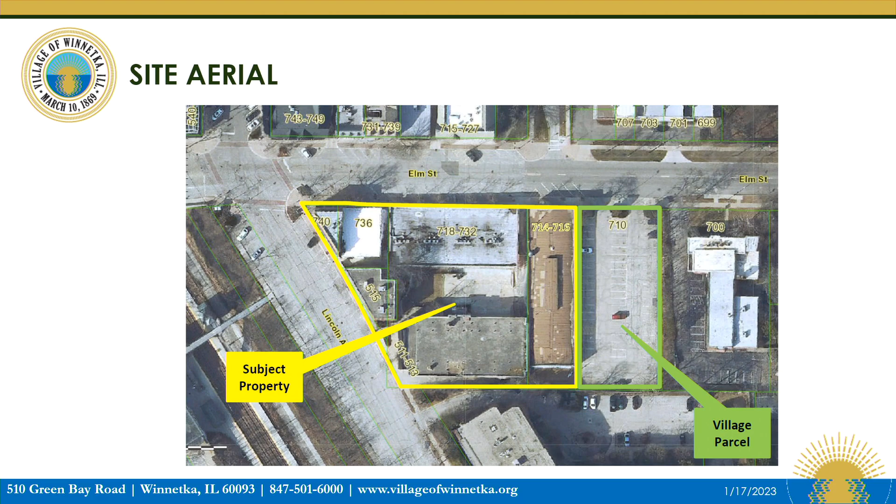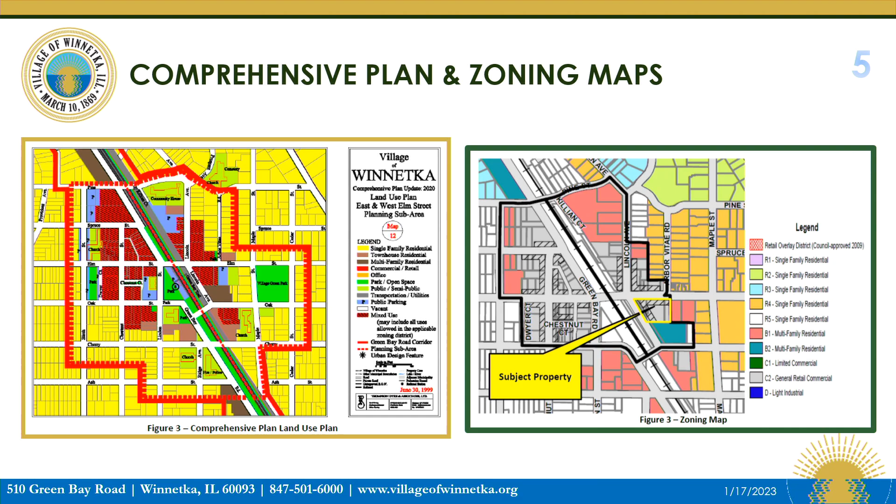Also, the code requires that on the 4th story of this 4-story structure, the building be set back 10 feet from the front property line, and there are portions along Lincoln Avenue that will not do that. Additional relief will be needed for front yard and rear yard setback exceptions.

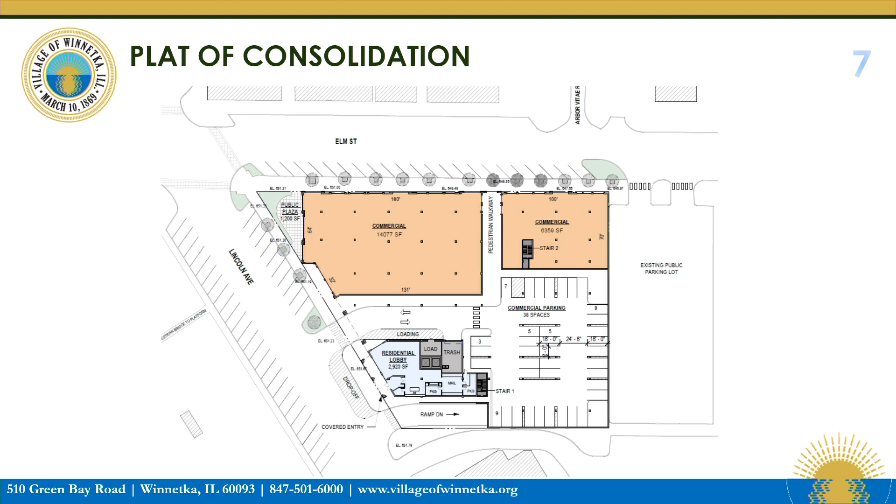On slide 9, you'll see they'll need front yard variations along Lincoln because the code requires the building to be at the property line or no more than 3 feet from it, and there are instances along Lincoln where it will be set back more than 3 feet.

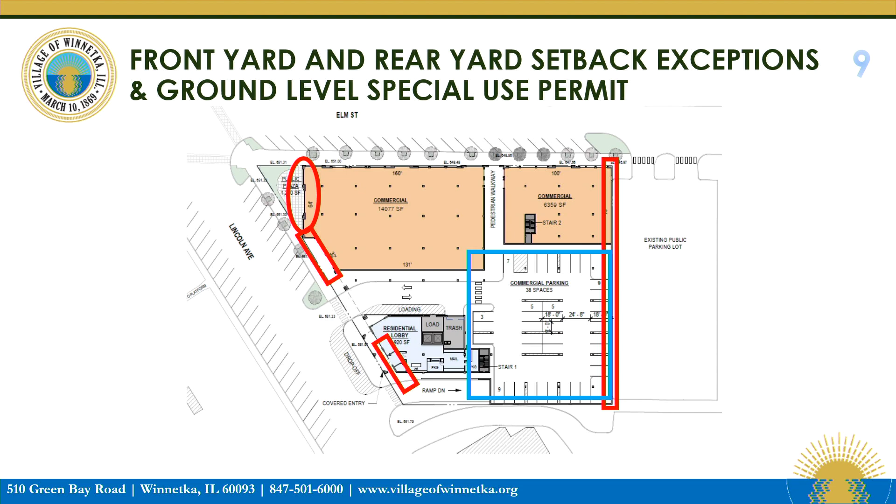Also on the east property line, which is the rear property line in this instance, they'll need a setback exception because the code requires at least 10 feet, and they're proposing something less than 10 feet. As shown on slide 9, the ground floor parking also requires special use approval.

On slide 10, the district does not require a side yard setback, but when one is provided it must be at least 3 feet, and along the south property line, in some areas the setback is not 3 feet or greater. Also along Elm Street, they're proposing some limited building elements that will project over the right-of-way, which would require a license agreement with the village.

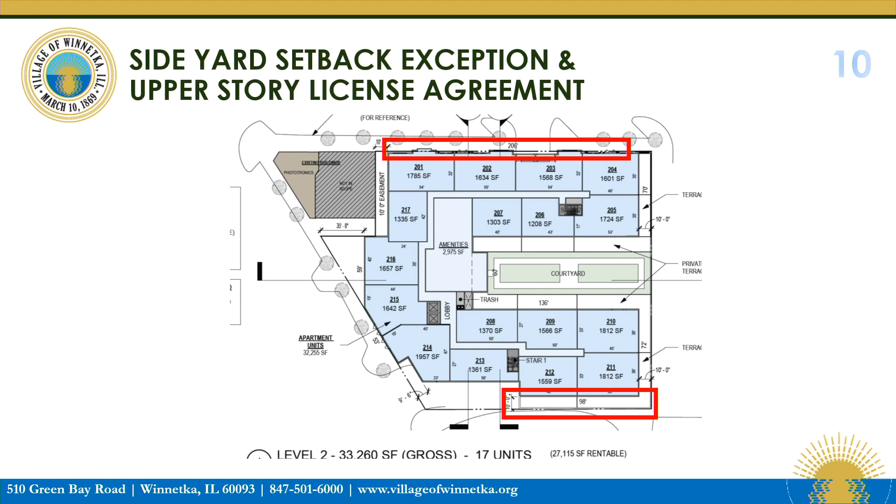On slide 11, the applicant is still considering the potential for leasing ground floor space to financial office uses and medical office uses. Both of those uses in the overlay district require special use permit approval, so in the future those uses would need that approval in order to locate there. As with the previous project, the applicant is interested in the council's thoughts on those uses going in on the ground floor along both streets.

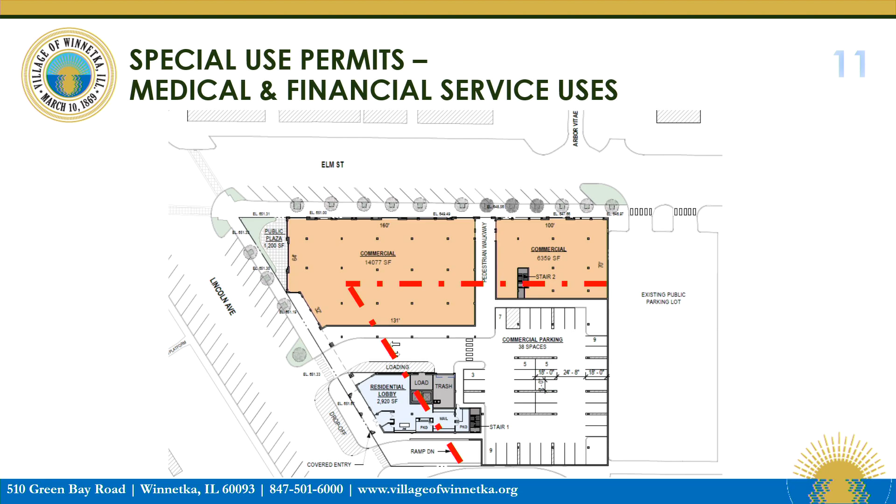When they submit for preliminary plan approval, if other exceptions come up, we would notice those as part of the formal process, or identify additional needs for exceptions. So with that, I'd be happy to answer any questions at this point or after the applicant has been given an opportunity to summarize their project.

Questions for Brian? David, please remind me, this building has a few recessed balconies and terraces right at the building facade. I don't think we have a lot of those around town. Who has the authority to determine what can go on those, relative to grills, decorative items, furniture, etc.? Because people are walking right along the sidewalk there and will see them quite clearly. Generally the village doesn't have specific regulations regarding that; it would be the building owner, unless as part of your approval of the planned development you decide to place limitations on those outdoor spaces in terms of what could be stored out there. Okay, thank you, good grab.

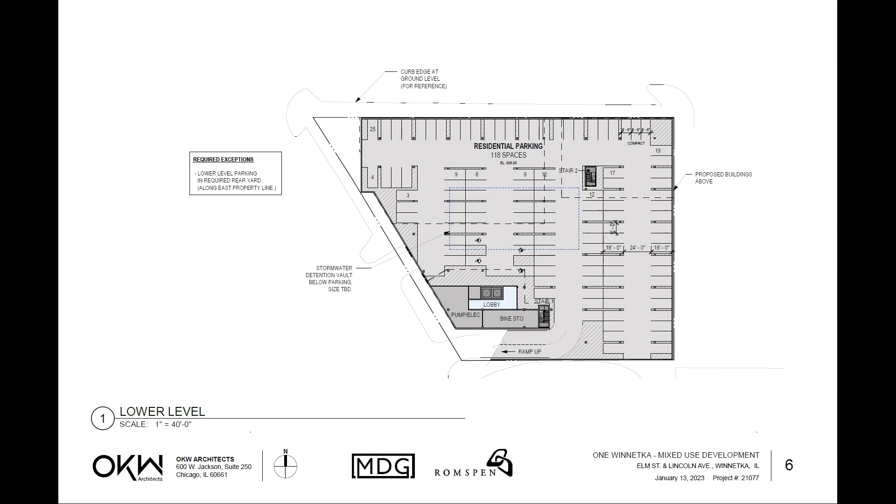One thing I wanted to touch on too, relative to the first floor, if you go back - I apologize - is the commercial parking spot we've identified with 38 cars. We anticipate that meeting code, which is 2 cars per 1,000 square feet. We have a little over 20,000, almost 21,000 square feet of commercial space. However, at least 15% of that commercial space we can identify as back-of-house storage, things that are not relevant, leasable, or in terms of habitable retail or office space. So if we remove 15% from that 21,000 square feet of commercial, we have more than 2 cars per 1,000 of usable commercial space. This is outlined in your ordinance here locally as well, so we're comfortable and confident that parking is meaningful to what it is we're doing.

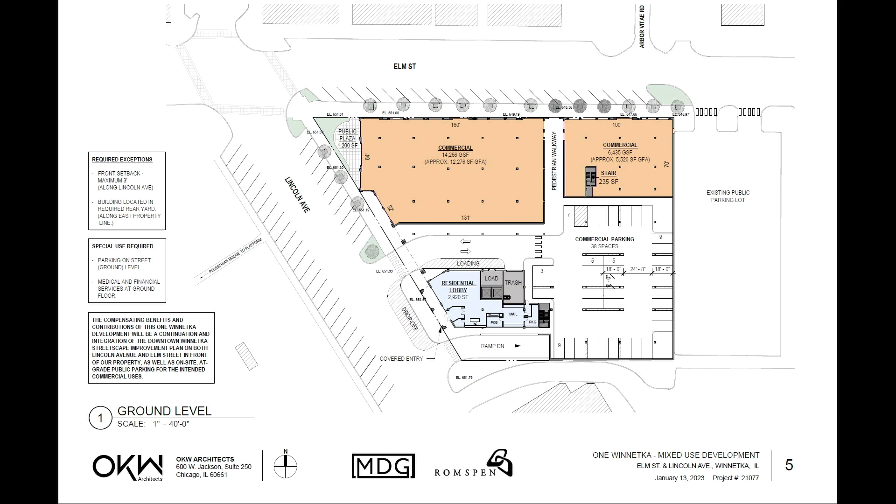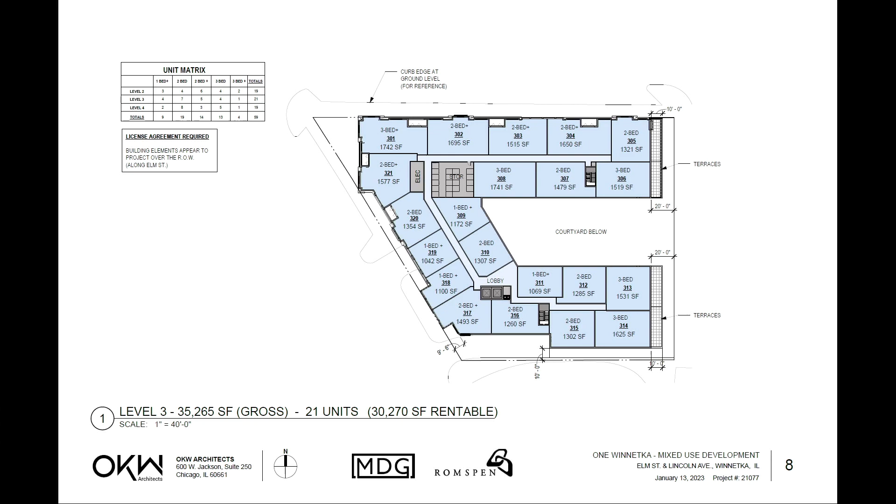So we spoke of the lower level on page 6. And page 7, you start to see on pages 7, 8, and 9, we have levels 2, 3, and 4 of our residential component. Of the 59 units we're anticipating today, 19 sit on level 2, 21 on level 3, and 19 again on level 4.

The units consist of 1 bedrooms plus den, and when I say a 1 bedroom plus den, that's almost 1,100 square feet, some of them larger, 1,100 square foot unit.

We have 2 bedrooms and 2 bedrooms plus den, so that's the unit mix that we're anticipating. There are no 1 bedrooms, there are no studios. These are large, comfortable units, with the smallest being over 1,000 square feet and the largest being 2,000 square feet.

You can see the unit layout and how the building is adjusting to the site and how it's pulling back, in that wedding cake kind of strategy that the village adheres to and that our architecture is reflective of. We're very cognizant of moving that building away from the streetscape to dampen the mass of it and supplement the architecture, to make it a more interesting building, to be perfectly honest with you.

Slide 10 is a simple section across Elm Street, which demonstrates our neighbors to the north across the street and the context of this building and the scale of that building. You've seen that same exhibit before.

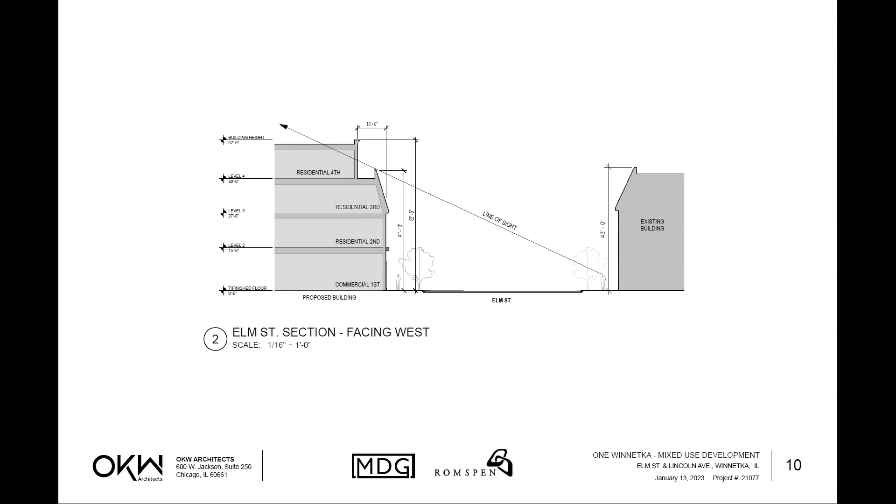The stacking diagrams, the axonometrics that are on page 11 are also reflective of that massing as we turn this building around and start to look at it from a variety of viewpoints, again with the notion that we're cognizant of breaking down the mass of the building, creating habitable outdoor spaces.

I think the question of what goes on in the balconies is a really good one, actually, and it's something we need to think about, because it is not our intent for it to be bike storage and 30-year-old Weber grills and the like, right? Beach towels and, yeah, correct. That is not the spirit of what this development is all about.

So as we further define the building and its use and the kind of qualities of it, that will be folded into all this, and that conversation will be had.

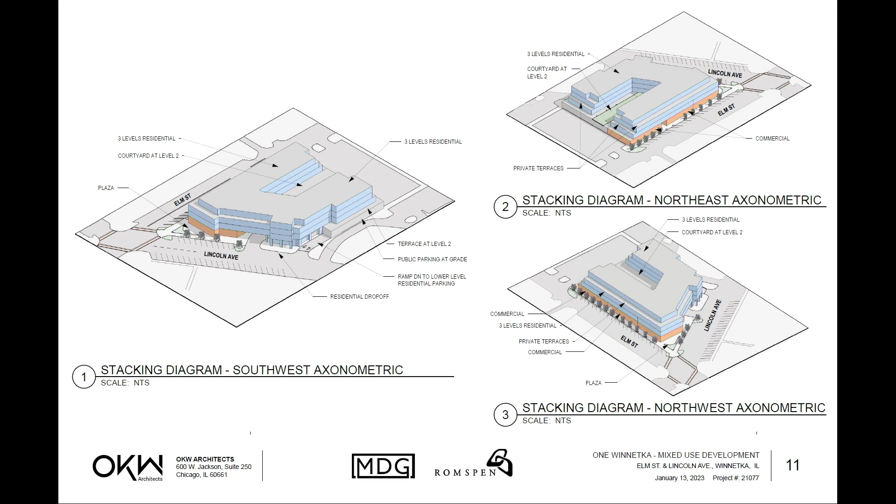Page 12 represents, again, some sections through the site to show how the courtyard functions, the spacing of the courtyard within the two wings of the apartments themselves, and the setbacks along the way, again emphasizing outdoor spaces when possible.

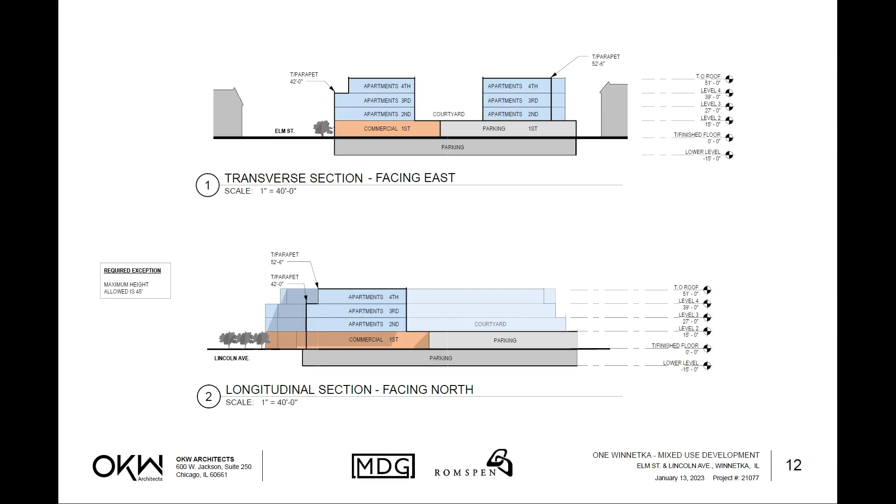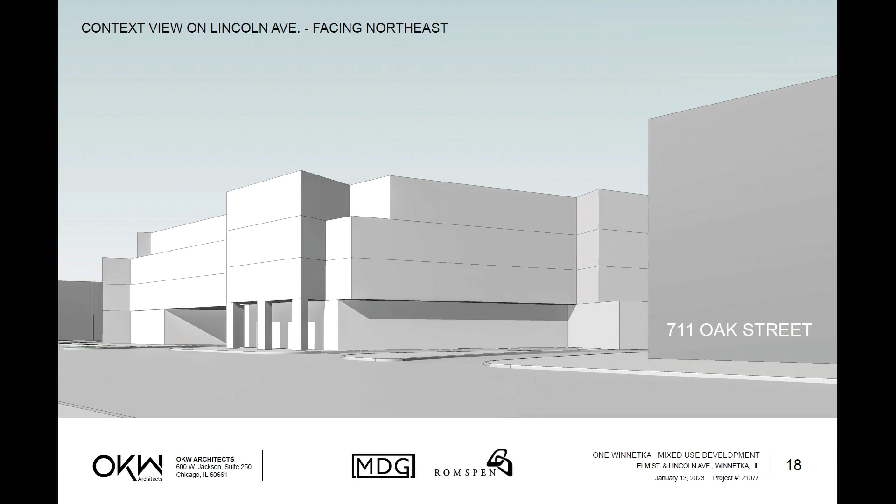The renderings, the elevations on page 16 begin to tell a story too about our grade change. The last time we were together, we spoke about a building that's 52 feet 6 inches tall to the top of the parapet. As we all know, the southwest corner of the site is the high point, and the northeast corner of the site is the low point. The southwest corner sits 9 inches above the finished floor of the building, and at the northeast corner, the grade is 3 feet 4 inches below the floor.

So there's a delta of 4 feet 1 inch as we go around this building, from the southwest corner to the northeast corner, the site drops 4 feet 1 inch. So we have a structure height which is from the grade, or from the finished floor to the parapet, of 51 feet 9 inches at one end. I'm sorry, structure height - the building height is from the finished floor. The structure height at the southwest corner is 51 feet 9 inches. At the northeast corner, it's 55 feet 10 inches because the grade is falling away from it.

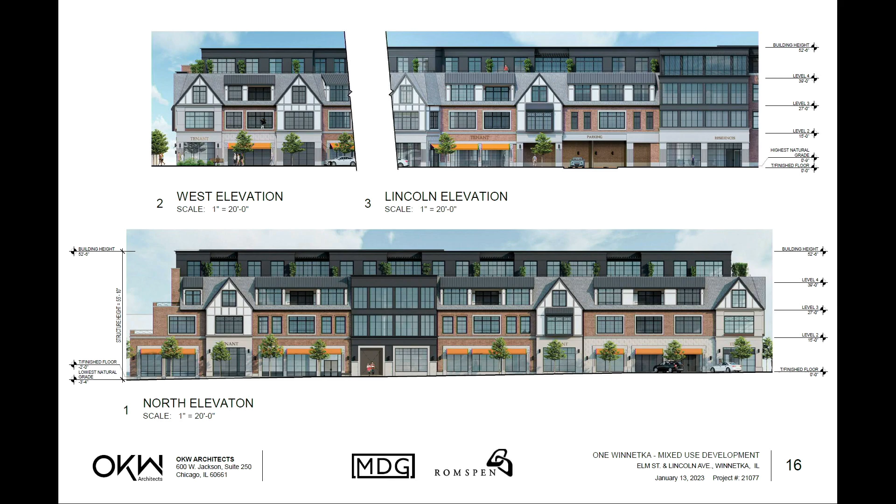So we just want to get that out as part of the conversation here. The building height, the parapet remains the same, the grade's falling away from it. So there's a delta of 51 feet 9 to 55 feet 10, 4 feet 1 inches overall of building height and expression on the east end that's not at the southwest corner. So we're working with that, and we're trying to dampen that as best we can, but it's a reality of the property.

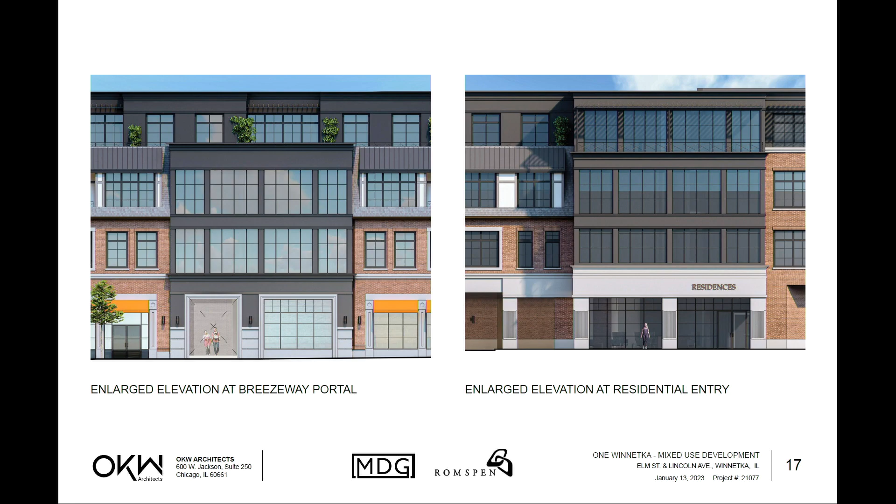Finally, on page 17, we're beginning to look a little more in detail at the portal along Elm Street and the access point to the parking beyond. We want to be very sensitive how we create that access point, because it wants to be welcoming, it wants to be bright, it wants to be well designed. That space does not want to be the tunnel underneath the tracks from the west side of Green Bay to the east side of Green Bay. This is not a place for graffiti and for kids to hang out.

This is an elegant part of an elegant building. So how we detail the inside of that pedestrian walkway remains to be seen. We're going to get to that, but we're sensitive to it, and we want to make sure that it's a comfortable place for our kids and our moms and dads and everybody else to walk through to get to their cars beyond. And finally, the residences over on Lincoln.

The strategy of these two building elements is somewhat similar. We're taking the palette of the fourth floor, a darkened palette which recedes, because we want to lessen the impact of that floor, and we take that and we waterfall it down the face of the building into a different kind of expression.

You know, Chris, when we were here last time, we spoke of Tudor architecture, right? And you, by your own admission, said you're not really a great fan of it, and nor am I. If it's done really, really well, historically well, it's an exceptional building style, but it's a very hard thing to replicate. Our intention with this building is not to just replicate something that lives somewhere else, but to take lessons learned from that in proportion, scale, materiality, things like that, and apply it in a more modern way, in a more effective way, in a way of the time.

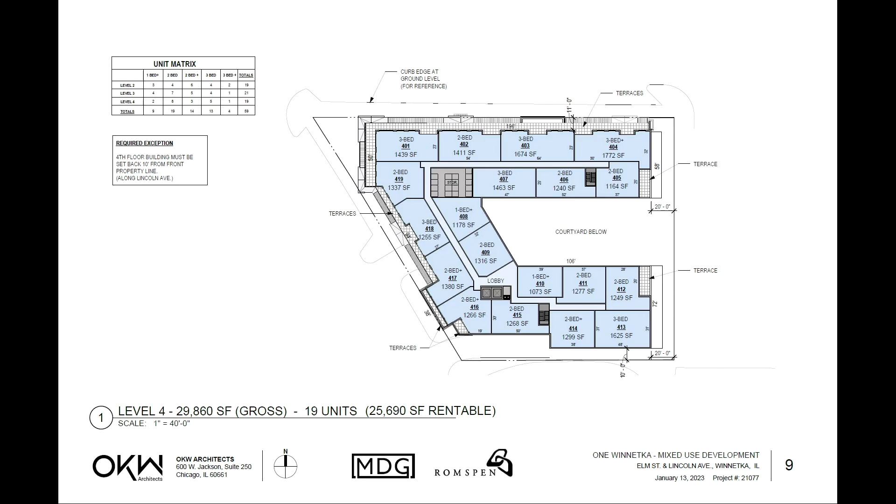The image showing the rectangle - was it along Elm Street? No, it was Lincoln, an oval you had drawn. The setback is in the C2 district - the building must be either at the property line or no farther back than 3 feet from the property line. So along Lincoln, the building is set back more than 3 feet, therefore they need an exception. Is that what was circled though? Yeah, the code wants you to go property line to property line in the commercial district.

So one setback was at the fourth level, and the other at the ground level, with the circle? Yes, that was the ground level. The terraces on the fourth level are set back a little over 11 feet, as an example, so that setback works fine. It's the fact that the building doesn't come to a point like the Flatiron in New York City - we've chamfered that corner to open up that little triangulated park. We just think it's a more successful way to deal with it - it softens up the corner. Okay, good.